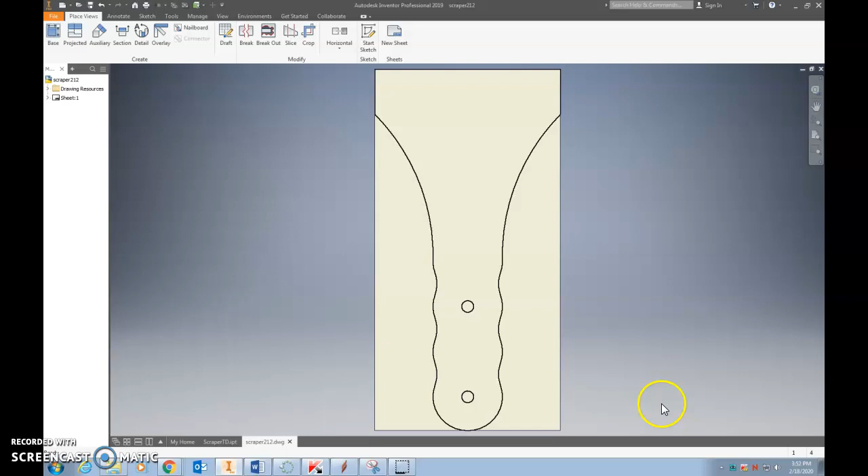I'm going to open Aspire and create a new file. The first thing we want to do is set up our job. You guys are going to have a 4x8 piece of Lexan, so width is 4, height is 8, thickness is 0.25. I know in the past you've used a center datum, but we're going to use the left and right. Everything else is the same.

You click OK. Now we've got to drop our PDF in. So what we're going to do is import vectors from file, and we're going to choose our PDF that we created that you guys have turned in on that other assignment. I'm going to click open, and then this drops in.

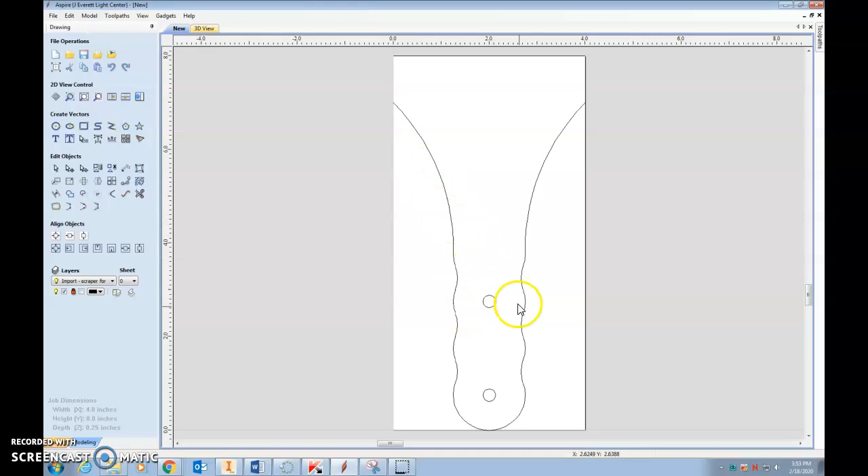So here's our part, and we're going to make two passes: one for the two holes, and one for the outline of the scraper. First we'll take the holes, and I'm going to select both of them by clicking on one, holding shift, and clicking on the other, then going up to my toolpath. In here we can create a bunch of toolpaths, and I hope we learn what more of these do.

We're going to use profile to cut the outside, but anything internal we'll use pocket. So I'm going to create a pocket. The cut depth is 0.24, which should get us through our material since it's a little thinner than 0.25. Our end mill will be a 0.25 inch end mill. You might want to check that your step over is 0.125, that'll help with the overlap, so just click OK on that. Everything else can stay the same.

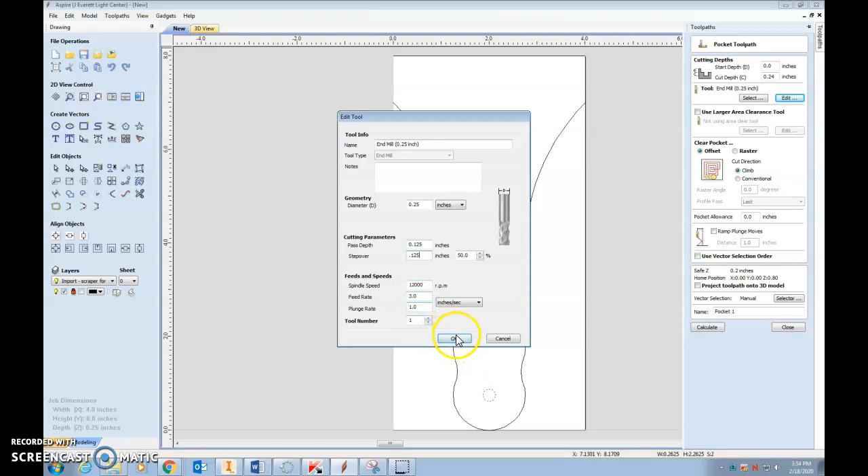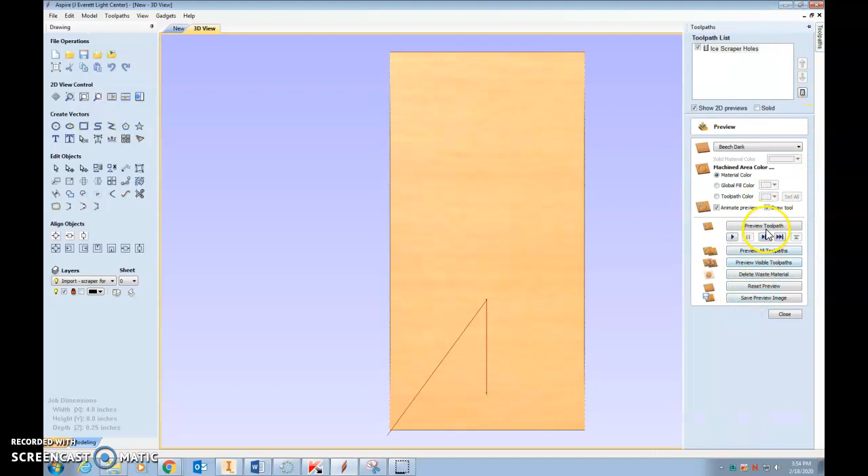Then we're going to go down here. Everything else is fine except we'll just title it holes, or ice scraper holes, and you click calculate, and that shows here. We can preview it by going over here and saying preview toolpath, and we should have our two holes cut into it.

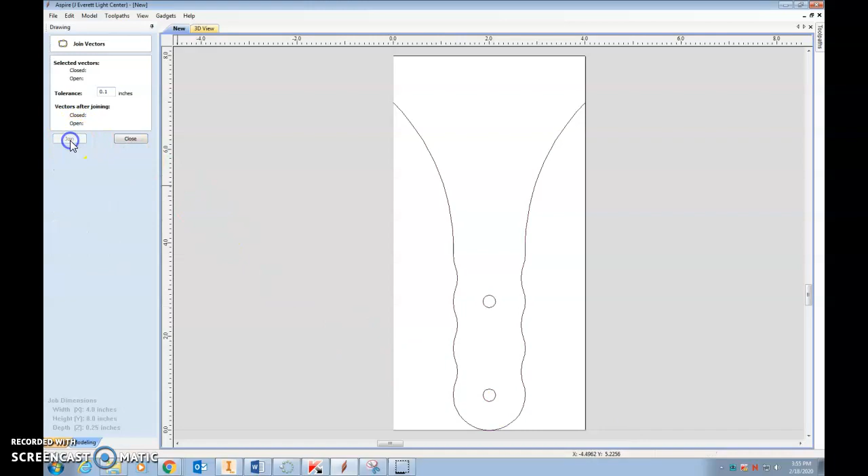Now we're going to click close on this, and we're going to make another toolpath. This time we're going to do profile. We've got to go over here to new, and right now they're all broken up, which kind of stinks. So what we've got to do is select them all, press J, and that's going to join, and that should join them all together.

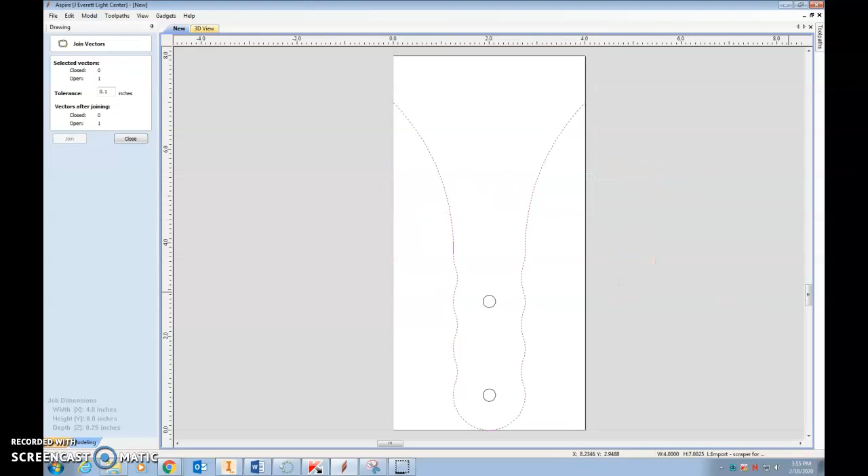I've been having this issue with these two not joining. I'm not sure why, so I figured out if you just select both of them, again holding shift to make that work, you right click and do join open vectors with a line. It ends up joining them together, so now we have the one profile.

Now I'm going to go back over to toolpaths. We already clicked 2D profile, and this has been being weird for me too, so I think I found out that 'on' works the best. Even though it shows that, it will still cut on the outside. So choose on, but normally you would want outside, so it would cut outside of the profile. I think because it's not closed, that's why it's being weird. So I'm going to click on.

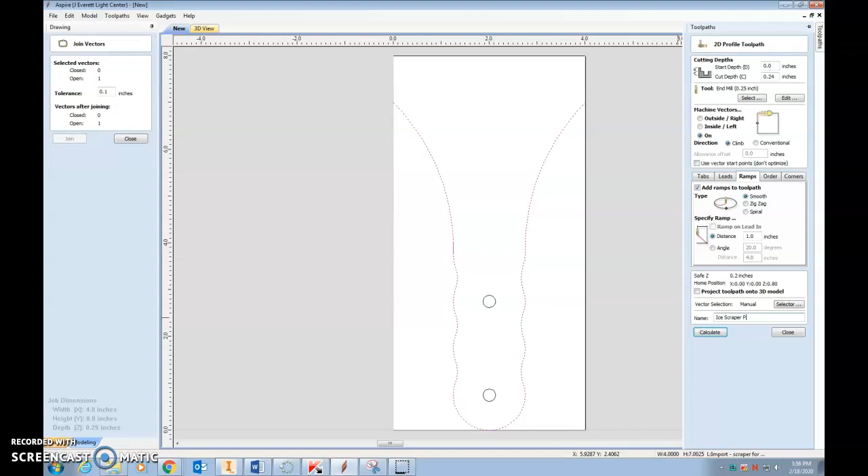Ramps, I like to ramp this, it's a little easier on the bits, so just do a 1 inch ramp. And then of course we name it, so just make sure we name this ice scraper profile and click calculate.

Now we can go back to our toolpath and do preview toolpath, and it cuts it out. This is what I want to see for your assignment, so you have this made.

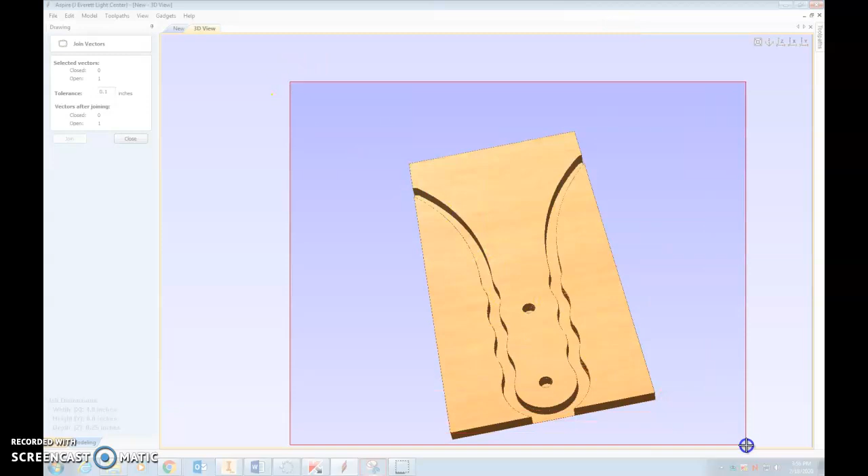Take your snip tool, snip the screen, write your name with the pen tool, save it somewhere, and then go ahead and submit that. This is part 2, I believe, and part 3 will be the handles.